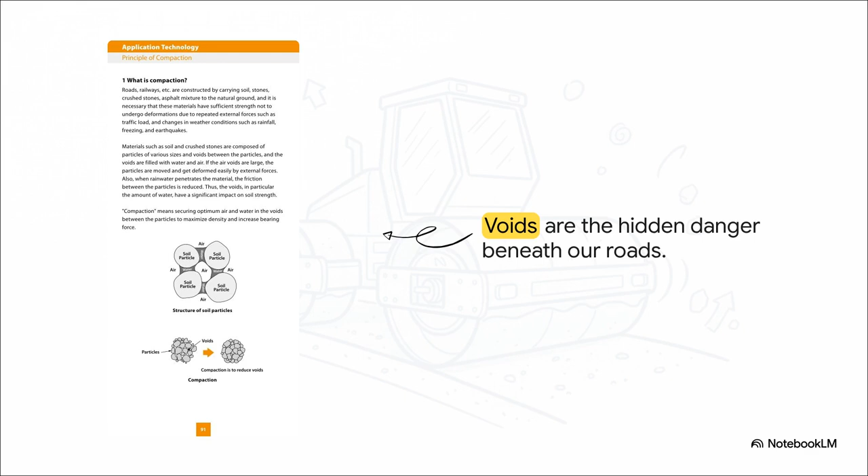And it gets worse. When rainwater penetrates the material, it acts exactly like a lubricant inside those voids, which severely reduces the structural friction between particles. Essentially, those empty spaces drastically undermine the bearing strength of the entire road base. So the crucial point is getting rid of those voids. That is the essential problem we have to solve here, and it's the exact physical definition of compaction, mechanically reducing the air and water from the material.

We're taking that naturally loose arrangement and forcing it into a tight, incredibly dense cluster. By eliminating the empty space, the particles are forced to physically touch. This drastic increase in surface contact mathematically multiplies the friction between them. And that amplified friction is what ultimately gives the ground its incredible bearing force and shear density, completely transforming loose dirt into a load-bearing foundation.

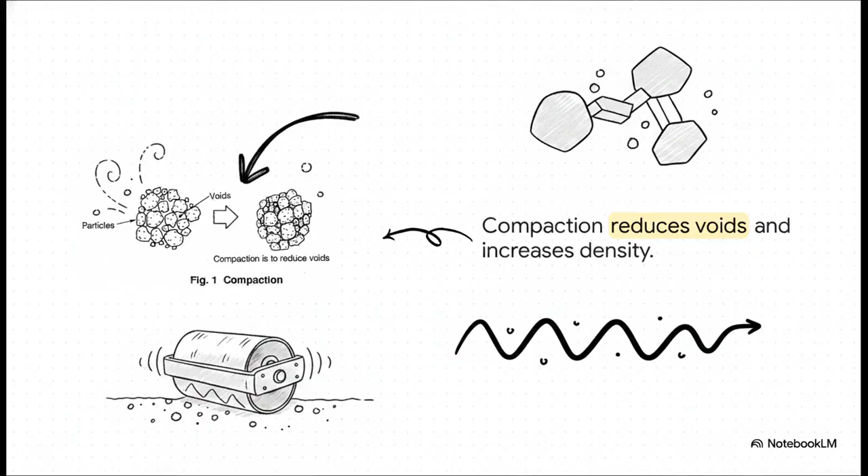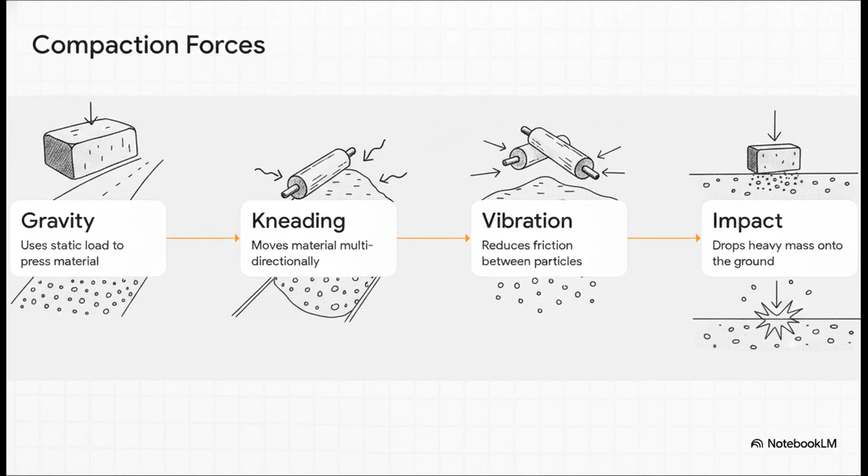Now, achieving that mechanical reduction requires a really precise application of force. Throughout history and even in modern engineering, we rely on four primary methods of compaction: gravity, kneading, vibration, and impact. Ancient builders relied almost entirely on static gravity to compact their rudimentary roads. But modern physics has taught us that to build incredibly durable highways capable of supporting millions of vehicles a year, we need a highly sophisticated, precisely calibrated mix of all four of these mechanical actions.

Let's compare the first two mechanisms for a second. Gravity versus kneading. Gravity compaction is basically what you get from a classic smooth steel roller. It's simply a heavy weight pushing straight down into the earth. But kneading? Kneading is a much more fascinating physical process. Think about making bread or pasta dough. When you knead dough, you aren't just pressing flatly down, you are actively pushing the material in all directions to work the microscopic pockets of air out of it.

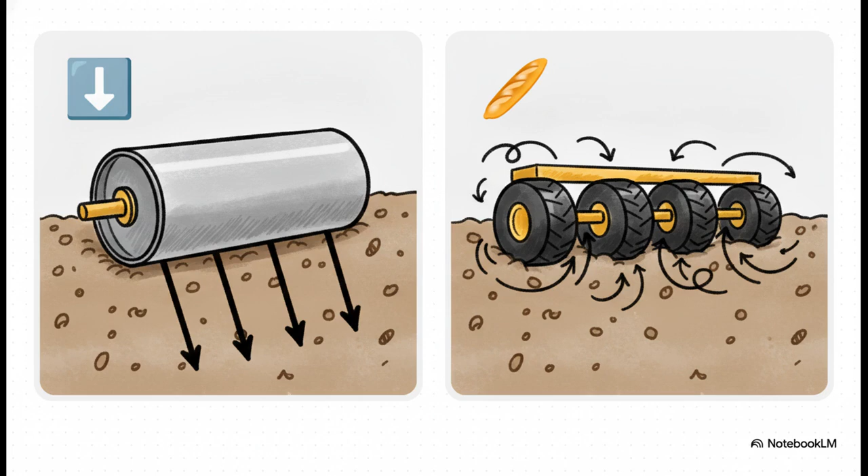Pneumatic tire rollers do the exact same thing to roads. The flexible rubber tires use a kneading action, shifting the hot asphalt multidirectionally to squeeze out voids way more effectively than just a flat static weight ever could.

The third method is impact compaction. This one is pure, straightforward kinetic force. Machines like rammers take a heavy mass and literally drop it onto the ground from a calculated height. The physical impact sends a deep kinetic shockwave traveling down into the material, violently forcing the particles together. It's a highly effective method for smaller, targeted areas or deep utility trenches where you need rapid consolidation.

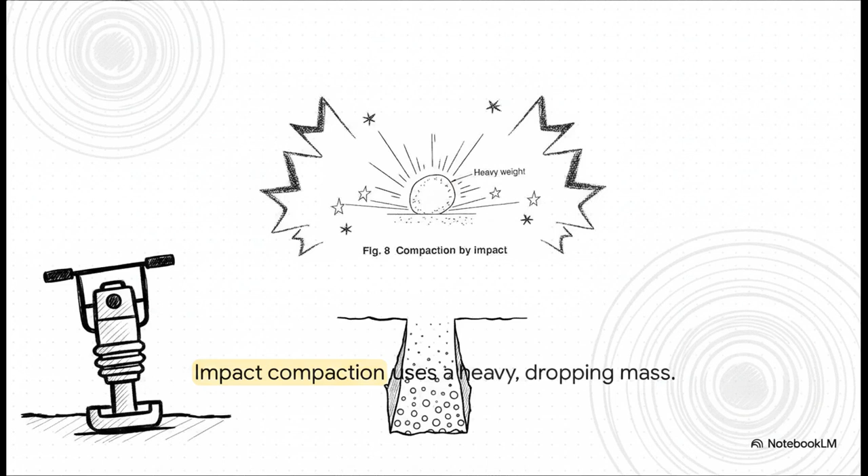But you know what? While gravity, kneading, and impact are all excellent tools, they're ultimately just the opening acts for the true scientific marvel of modern road construction. And that brings us to vibration. When we talk about vibration and compaction, we're talking about actively breaking the fundamental rules of microscopic friction. Instead of just pushing down from the top and hoping the weight transfers all the way to the bottom layers, vibration actually releases the intermeshing between the individual particles.

By rapidly shaking them at very specific frequencies, the static friction temporarily holding them in their loose state is just completely broken. This momentary weightlessness allows the particles to freely compress under the mass of the machine. And this brilliantly illustrates what happens next. This application of physics forces those once loose, jagged particles to shake, spin, and neatly intermesh with one another.

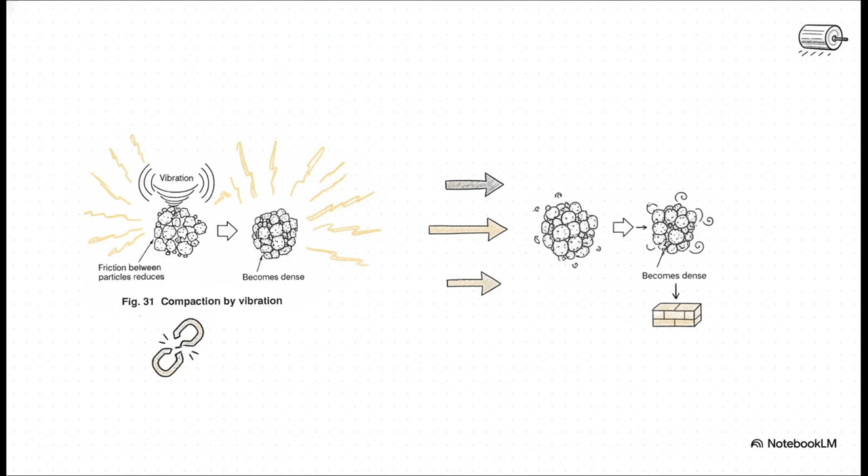Because that restrictive friction lock is completely broken by the vibrational frequency, the particles naturally settle into the absolute tightest, most densely packed configuration possible. It is no longer just a matter of squishing dirt together. It's practically vibrating the raw material into a solid, structurally sound interlocking foundation. It's almost like magic, but it's pure science.

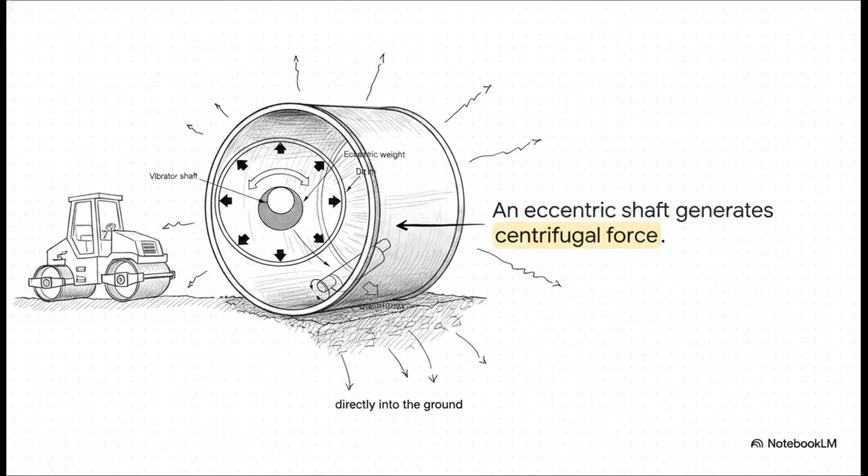But you might be wondering, how on earth does a massive steel machine actually generate that kind of ground-shaking power? Well, inside that giant steel drum is an eccentric rotating shaft. Now, eccentric simply means there's a heavy mass physically offset from the shaft's centerline. As this internal shaft rotates at incredibly high speeds, that unevenly distributed weight generates a massive, continuous 360-degree centrifugal force. That raw, physical energy is transferred right through the steel drum and directly down into the ground beneath it.

Engineers, however, didn't stop at just creating raw centrifugal force. They actually figured out how to precisely steer and direct this energy based on the job at hand. So, we have three main types of directed vibration. First, standard vibration is circular, pushing energy out in a full 360 degrees. This is the powerful, everyday go-to method. Second, we have vertical vibration, which uses two synchronized eccentric shafts to focus all the kinetic energy strictly up and down. This is specifically designed for incredibly thick soil layers, sometimes up to 60 centimeters deep.

And finally, we have oscillation. This is a totally ingenious method that uses two counterweights rotating in opposite directions to completely cancel out the vertical movement, creating a purely horizontal, side-to-side force.

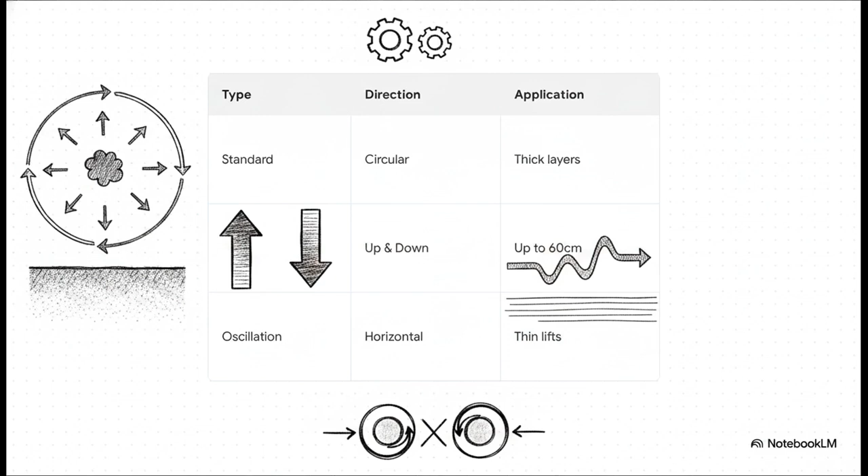As you can see, the choice between standard circular vibration and oscillation comes down entirely to the depth and delicacy of the material. Oscillation is perfectly calibrated for thin lifts, meaning pavement layers that are 5 centimeters or less. Because the force is strictly horizontal, it's gentle enough for delicate bridge decks or residential areas where you absolutely don't want to rattle nearby houses off their foundations. Conversely, standard circular vibration is designed to aggressively penetrate deeply into the ground, making it the ideal physical tool for thick asphalt layers that are more than 5 centimeters deep.

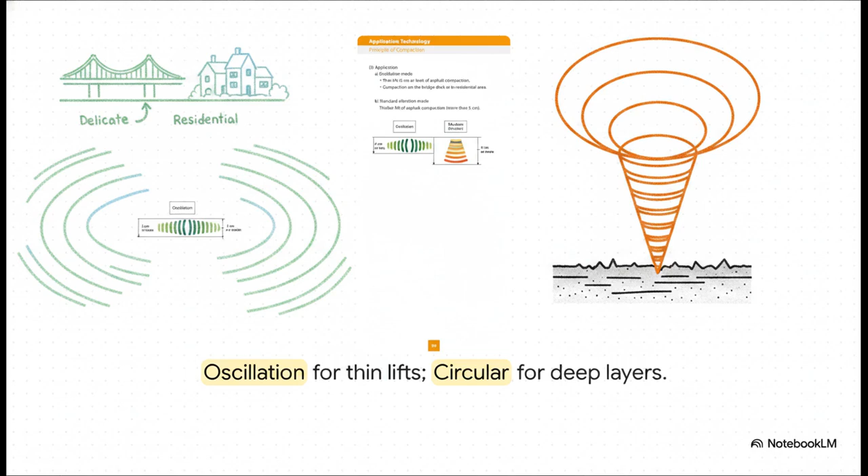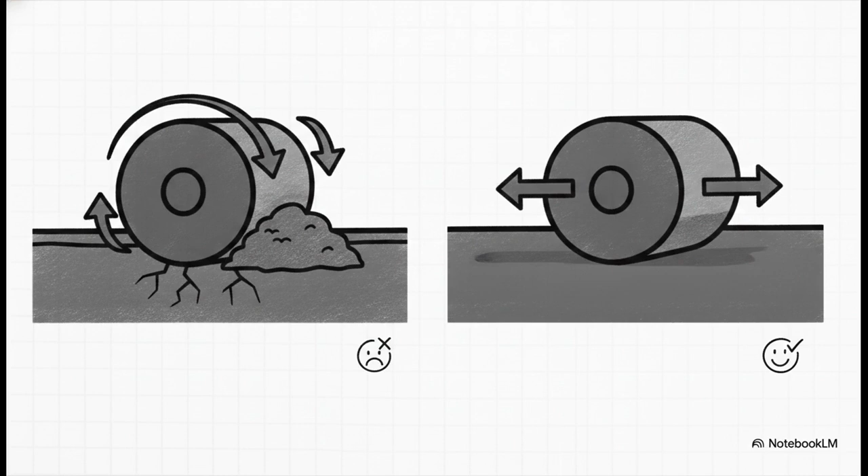So, you might ask, why not just use standard vertical or circular vibration for everything? Well, because physics always demands a trade-off. Conventional circular vibration creates a really powerful moment of inertia. When you use it on thin, hot asphalt, it actually pushes a bow wave of material right in front of the drum, much like the bow of a boat pushing through water. This microscopic wave can cause tiny hairline cracks in the asphalt mat, permanently damage the base structure, and completely ruin the smoothness of the road. Oscillation, by keeping the force entirely horizontal, cancels this destructive bow wave effect out completely.

Now, what's really interesting about this slide is what happens when we combine these compaction technologies. The result is unprecedented structural density. If you use a traditional static tire roller on an asphalt layer, you typically achieve 92% density at the top and 95% at the bottom, creating an uneven bottom-up gradient. If you use a standard double drum vibratory roller, it creates the reverse, a top-down gradient with 95% at the top but only 92% at the bottom.

But when engineers perfectly combine standard vibration with the dynamic kneading action of pneumatic tires, the physics align. You achieve a perfect, uniform 95% density from the very top of the surface straight down to the base. It is a true masterpiece of applied engineering.

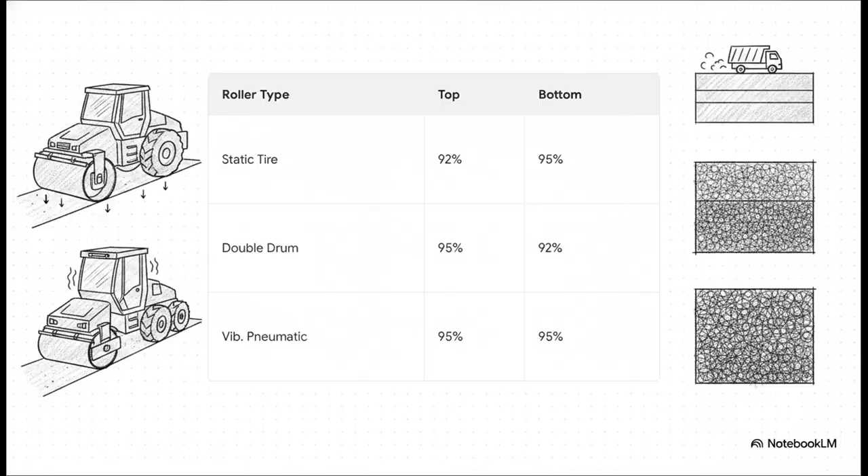Let's zoom out for a second and look at the macro impact of this perfectly uniform density. It doesn't just mean the road physically lasts longer. A uniformly dense, incredibly smooth surface drastically reduces road noise for surrounding neighborhoods. For everyday drivers like us, less rolling resistance on a perfectly flat road means significantly better fuel consumption over the life of the highway. And for the construction crews, a modern 9-ton vibratory pneumatic machine can achieve the exact same compaction as an old-school massive 25-ton static model. That saves a staggering amount of hauling costs, logistics, and fuel just getting the equipment to the job site.

Which brings us to the end of our explainer with a question to ponder. The next time you're cruising down a perfectly smooth stretch of highway, feeling your car glide effortlessly over the asphalt, ask yourself, was this road just pressed down by brute force, or was it carefully, scientifically vibrated into perfection? Because as we've explored today, understanding microscopic particle physics, harnessing centrifugal forces, and actively manipulating friction are the true, hidden builders of the modern world.